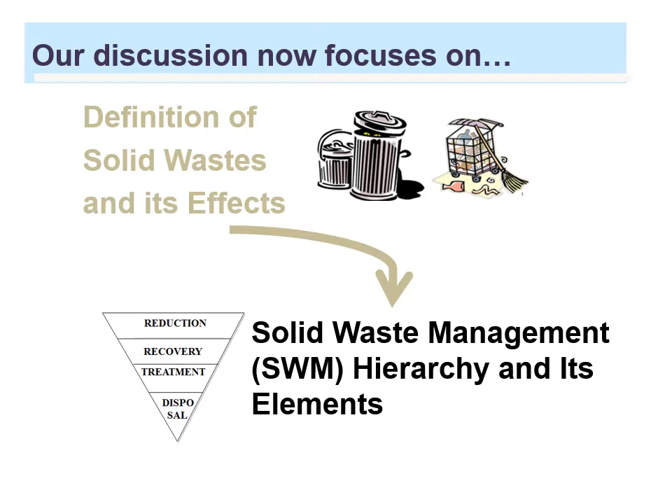This is the solid waste management hierarchy. It ranks the various management strategies from most to least environmentally preferred: prevention, reduction, recycling, treatment, and disposal. Prevention contributes the most to solving solid waste management, while disposal contributes the least towards the solid waste problem.

Prevention generally means there is no solid waste produced within the process. This is the most ideal, since if there is no solid waste, then there is no solid waste problem. Since this is very unlikely in a process, the next method in solving the solid waste problem is reduction.

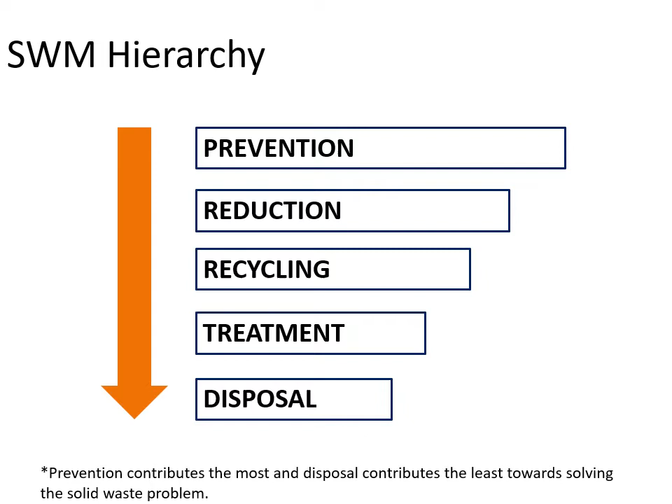Source reduction has common industry practices. First, we have materials reduction, which means reducing materials initially used. For example, plastic bottles before are generally different from the plastic bottles we have right now.

One example is the cap - the cap before is generally bigger than the cap in our plastic bottles right now. Also, the plastic bottles before were thicker compared to our plastic bottles these days - now they're thinner and generally more flimsy than before. That's an example of materials reduction.

We also have material substitution, which substitutes waste materials for more usable or biodegradable ones. For example, the use of eco bags or reusable eco bags instead of plastic bags - we substitute plastic bags for eco bags. Also, using reusable utensils instead of disposable ones.

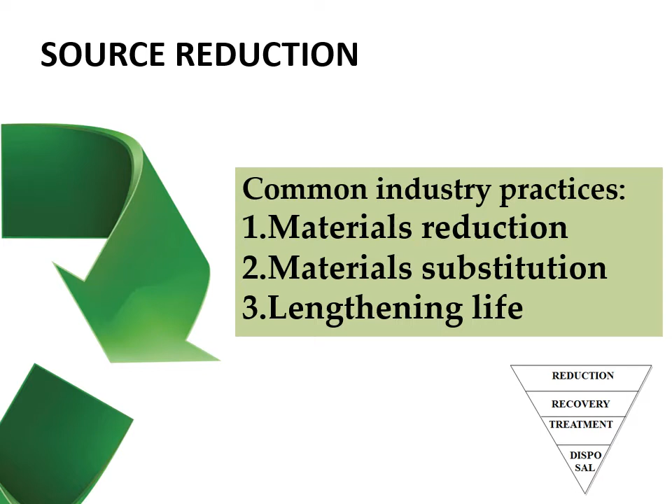We also have the lengthening of life, where the lifespan of a certain solid waste or potential solid waste can be increased to reduce solid waste as much as possible. This increases the reusability of a certain material so it will not go to waste as often. If one item has a longer lifespan, it reduces its chances of becoming solid waste - that's also one of the practices in the industry.

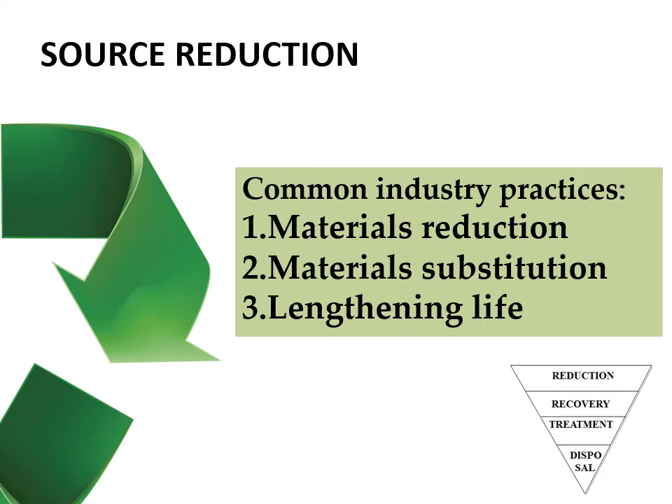Next we have recycling, or segregation and recycling. When our solid wastes are recycled and segregated, it is easier for us to identify its methods of disposal or recycling.

For example, in this photo, we have recyclable waste, or 'di nabubulok', which is non-biodegradable - these are commonly plastic bottles and such, which are non-biodegradable and recyclable. We also have 'nabubulok', or biodegradable.

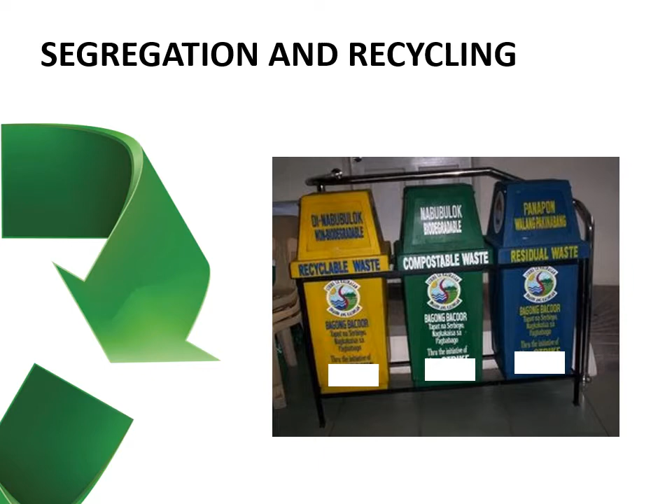These are compostable waste, generally food wastes or waste that decompose. We also have residual waste - these are wastes that cannot be recycled anymore and need to be disposed of.

Next we have treatment, or recovery and treatment. Resource recovery can be classified into two: material recovery and energy recovery. In materials recovery, this is generally also recycling.

For example, paper or newspapers can be used again to make more paper - this is called paper pulping. We also have composting, or biological reprocessing, where food scraps and other biodegradable materials can be turned into fertilizer, which is brought back into our plants and crops, and so the cycle goes on.

We also have energy recovery, which we have already tackled earlier on. This includes incineration, pyrolysis, biodigesters, RDF or refuse derived fuel, and landfill gas extraction.

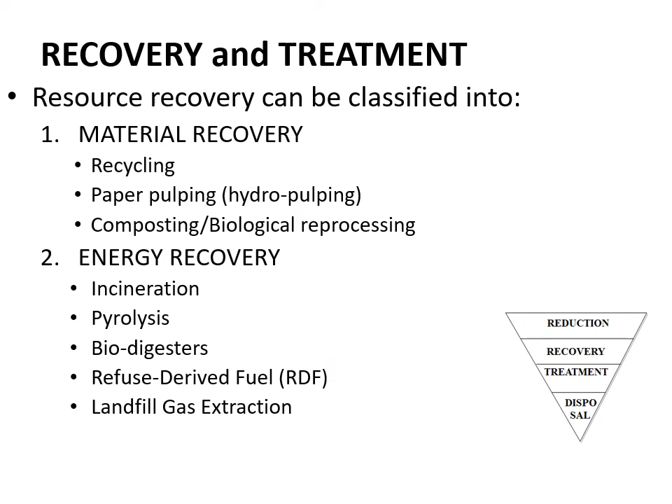All right, so let's take a look at composting and how it's done.

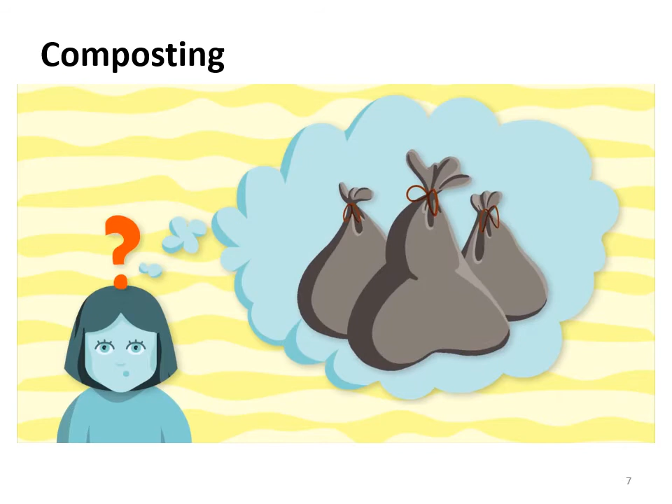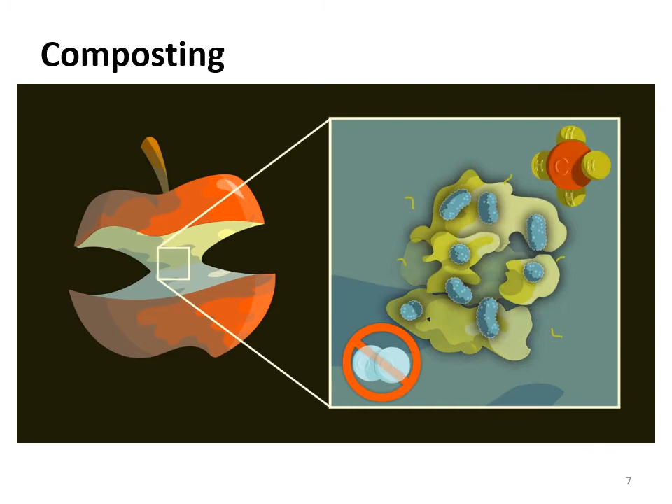Have you ever thought about where your leftover food goes after you throw it in the trash? Or the consequences that it has for our planet? In the US alone, about 37 million tons of discarded food were brought to landfills in 2015 - that's equal to the weight of 100 Empire State Buildings. In landfills, food scraps and other organic material are broken down by bacteria in the absence of oxygen, which produces methane, a potent greenhouse gas with even greater capacity to trap heat in our atmosphere than carbon dioxide.

Composting is an eco-friendly alternative to discarding our food waste with three important advantages. First, composting allows food scraps to degrade in the presence of oxygen, meaning no methane is produced. Second, composting mimics natural nutrient recycling processes, breaking down biodegradable materials to produce organic fertilizer, a sustainable alternative to synthetic fertilizers that require high amounts of fossil fuel energy to produce. Third, composting diverts waste from landfills, preserving natural ecosystems that would otherwise be cleared for landfill use.

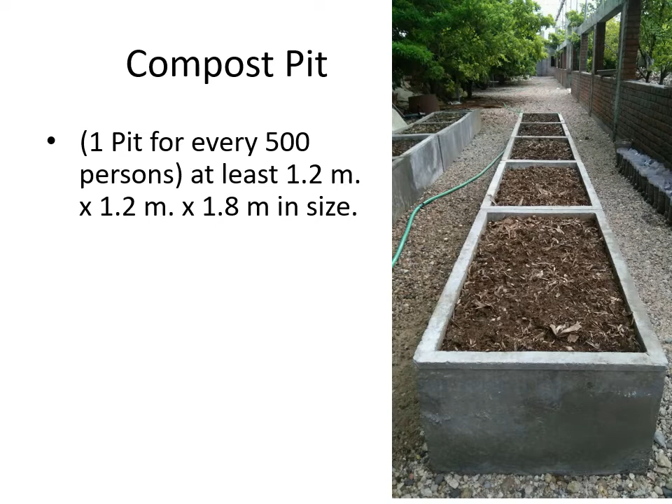But generally, a compost pit or composting is only for biodegradable materials. Non-biodegradable materials like plastic and sometimes paper or other materials that are non-biodegradable are not suitable for composting.

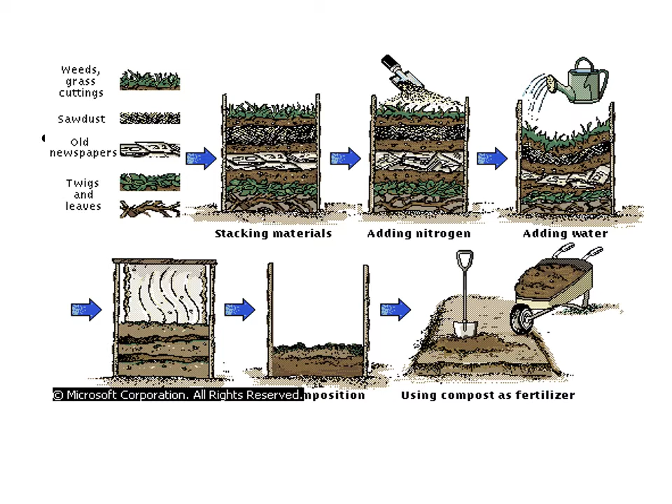So this is an example of a compost pit. We have stacking materials: twigs and leaves, old newspapers, sawdust, and weeds and grass cuttings at the top. If you add nitrogen or nutrition, like food scraps, and you add water, it promotes composting. It decomposes and becomes fertilizer. Then you can use the compost as fertilizer. All right, so there are no wastes generated.

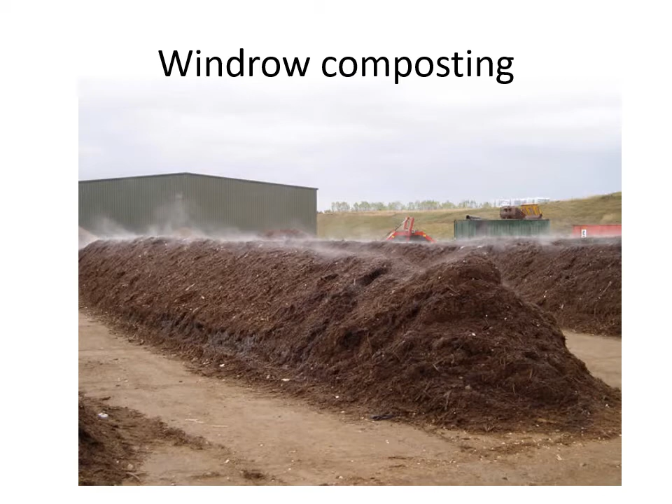In the industry, we have different types of composting, usually in the agricultural or farm industry. We have windrow composting.

How do we maintain 16 to 18% oxygen in these very large composting windrows? Doing this requires two things: first, an understanding of how air moves in a compost windrow, and secondly, an appreciation for the need for enough porosity in the compost material.

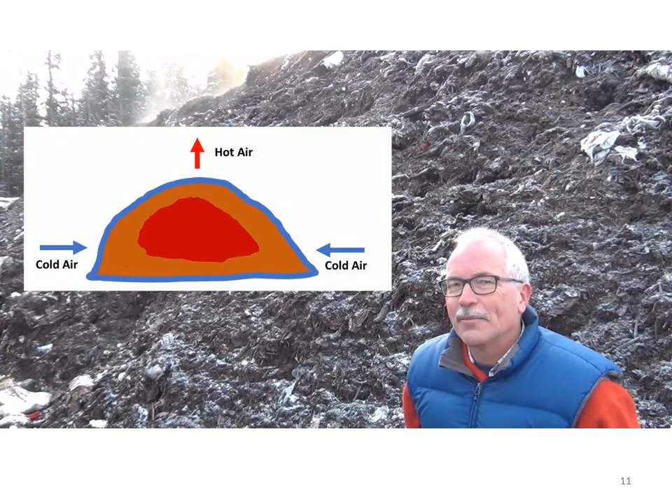The way aeration works in a regular compost pile is that as the core of the pile heats up, that hot air wants to rise, and as it rises it creates a vacuum, drawing cold air in from the side. As we increase the size of the windrow, this gets much more difficult because there's not enough oxygen in the core to create those high temperatures.

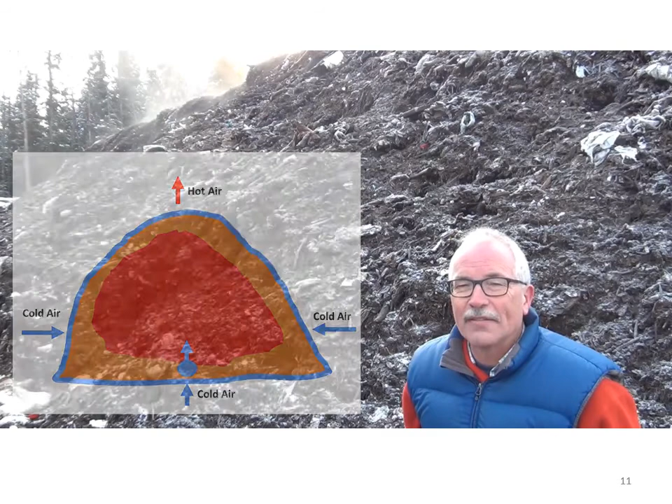The solution is to provide aeration. By placing a 4 to 6 inch diameter pipe underneath the bottom of the windrow, we achieve two things. First, we add oxygen to the core of the pile, which allows that pile to heat up and create the vacuum required to draw cool air in from the side. Secondly, the force of the air coming up through the pipe creates a bit of an aspiration effect where it also draws in cold air from the side.

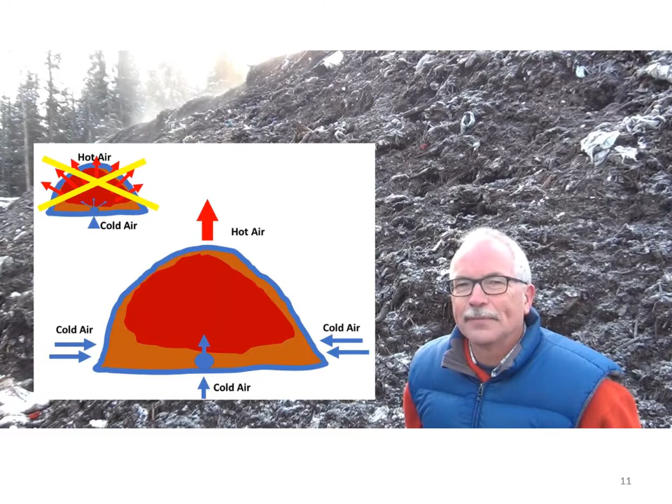The result is that we can provide 16 to 18% oxygen in very large windrows using a very small centrifugal blower. In this particular case, we have windrows that are 30 feet wide, 15 feet high, and up to 120 feet long, and they're aerated with a half horsepower centrifugal blower. The energy and air requirement for a similar quantity of composting material in an aerated bunker or extended aerated pile would be dramatically greater.

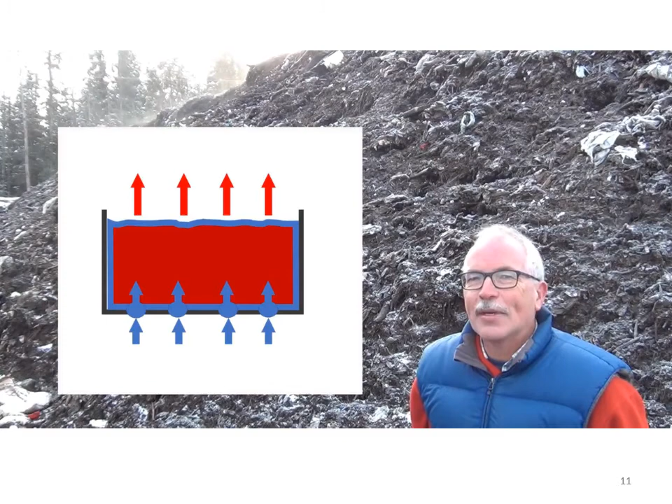So we can see, by understanding the dynamics of how air works in a composting windrow, we can produce a high quality compost, maintain very high oxygen concentrations, and reduce odor for a minimal cost.

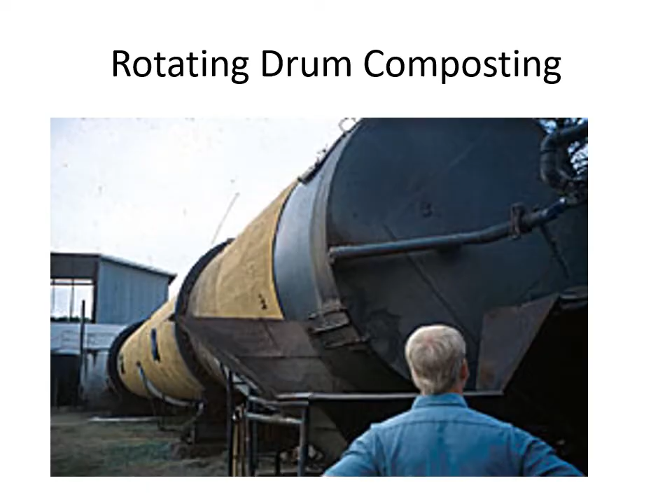So generally, in composting, nature has its way in decomposing materials. But for example, in a biodigester, it uses anaerobic digestion, or decomposition without the presence of oxygen.

And so these materials produce methane. This methane, or biogas, for example, as you can see here, there is waste produced, for example, from the market, and then this is fed into a digester.

In the digester, the sewage sludge decomposes and produces methane gas. This methane gas is fed into a storage area, or methane storage, or it is turned into electricity. And so the solids, on the other hand, become compost and eventually become fertilizer.

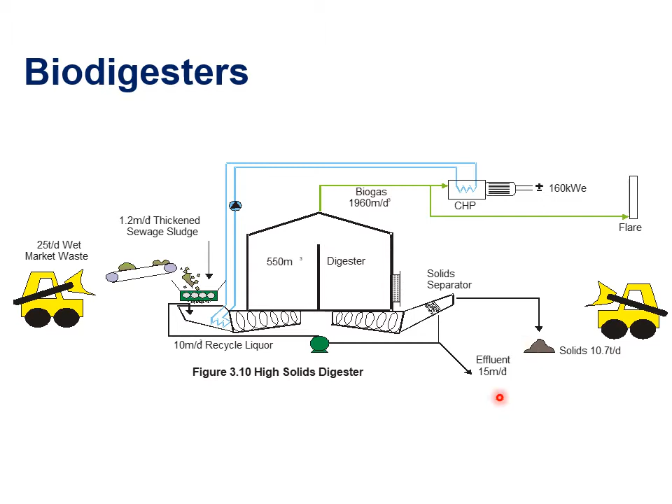All right, so this is a biodigester. This is how a biodigester works.

In the spring of 2013, the Saskatchewan Research Council built a biodigester for the Canada Agriculture and Food Museum in Ottawa. SRC created a small-scale model of a biodigester, a system that converts farm waste into energy.

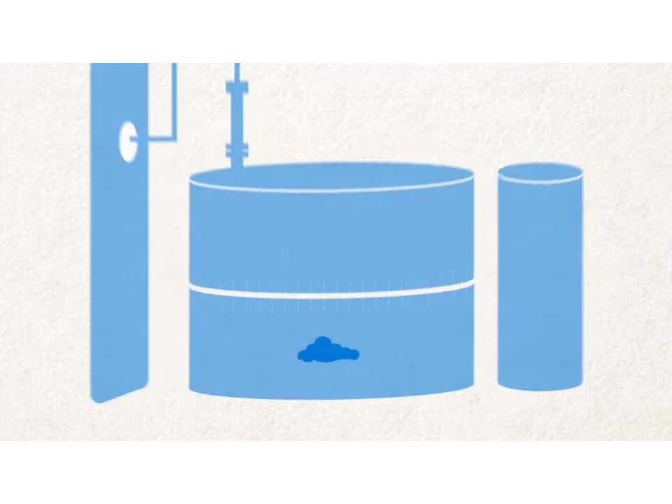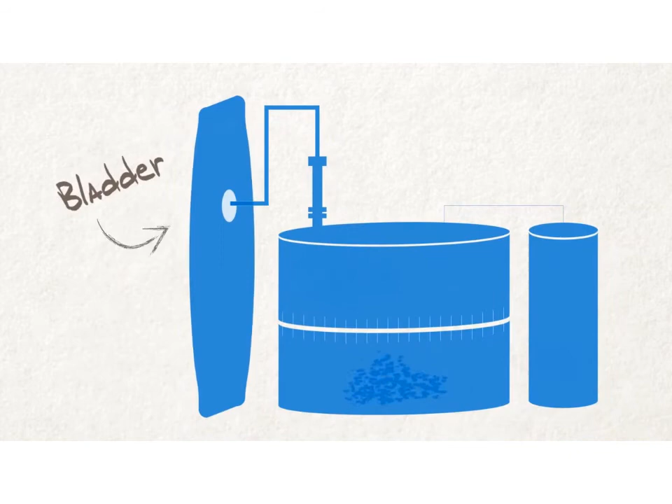Manure from the farm is put into the tank, where microorganisms ingest it and produce methane gas. The methane is collected at the top of the tank and moves into the bladder, which looks like a big bag. When the bladder is full, it releases the gas, which can be used as a source of energy.

Back inside the tank, the leftover product is called digestate, which can be removed from the tank and used as fertilizer. The biodigester is a truly sustainable concept. It turns a waste product into energy and fertilizer, and is a tool that can help farms across Canada become more environmentally friendly.

Alright, so that was a biodigester.

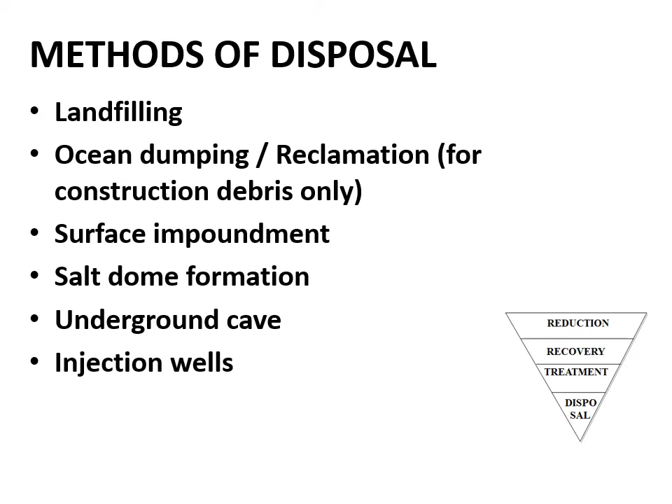So let's focus on the most common, which is landfilling. But before that, there is such a thing as open dumps.

If you know the Smoky Mountain in Tondo, Manila, it is supposed to be a landfill, but you will know later on why it is not. Alright, so it was actually just an open dump. Generally, open dumps are open.

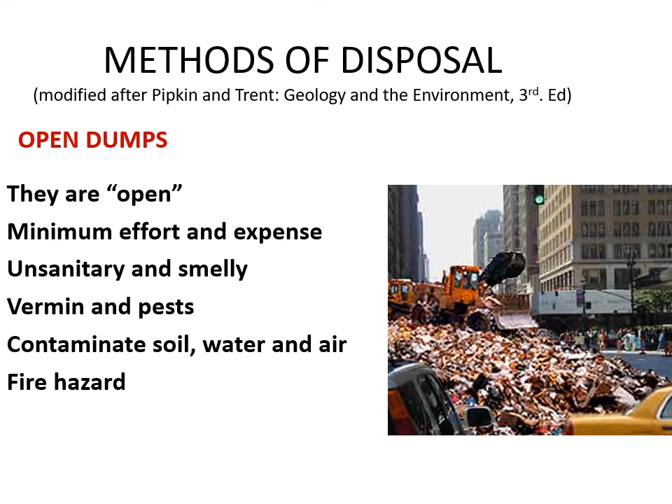So open dumps have minimum effort and expense, but they are unsanitary and smelly, and promote vermin and pests in the surrounding areas. They contaminate soil, water, and air, and are a fire hazard. You'll know later on why it's a fire hazard. So this is an open dump area.

Now, in a sanitary landfill, these days open dumps should be replaced with sanitary landfills. Each day, trash is spread in thin layers, then compacted down and covered with a layer of soil, and graded for drainage. For example, step one: unload the solid waste and spread it into thin layers. Then these layers are compacted and covered with soil.

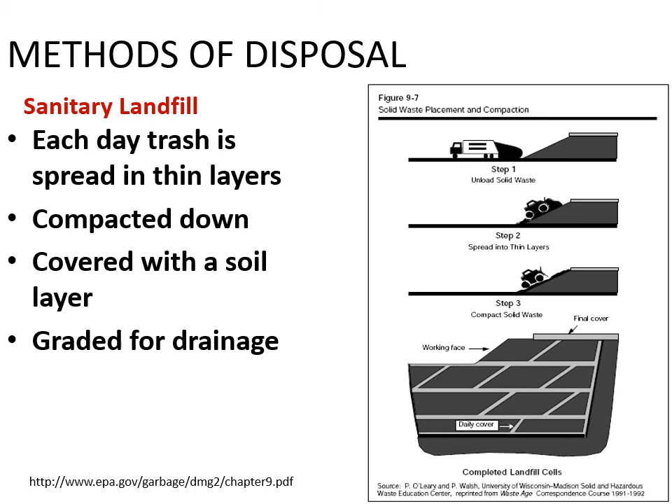So these sanitary landfills have largely replaced open dumps. This is the explanation, or an example, of sanitary landfilling. A sanitary landfill is an excellent method of solid waste management.

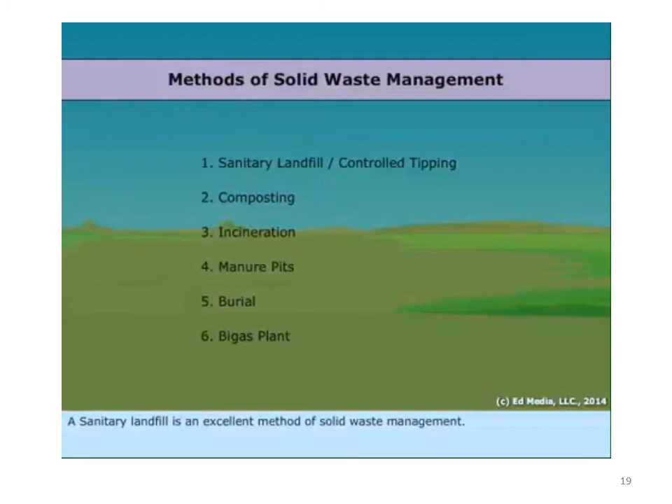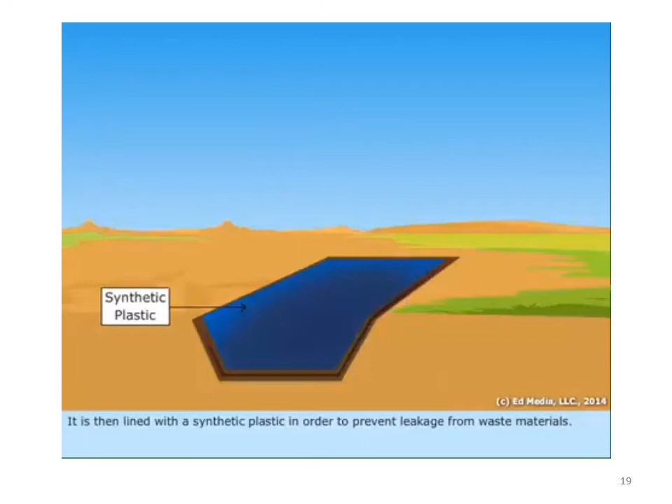Initially, a large pit or depression is made by the removal of topsoil. It is then lined with synthetic plastic in order to prevent leakage from waste materials. This is called a bottom liner. Garbage wastes are dumped into the landfill and properly compressed using specialized machines.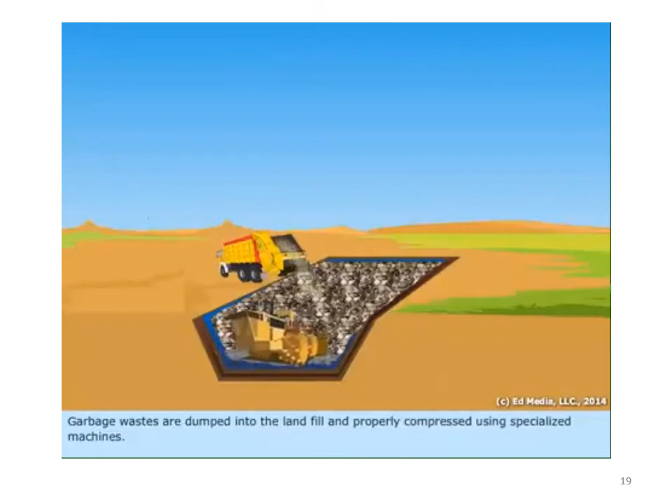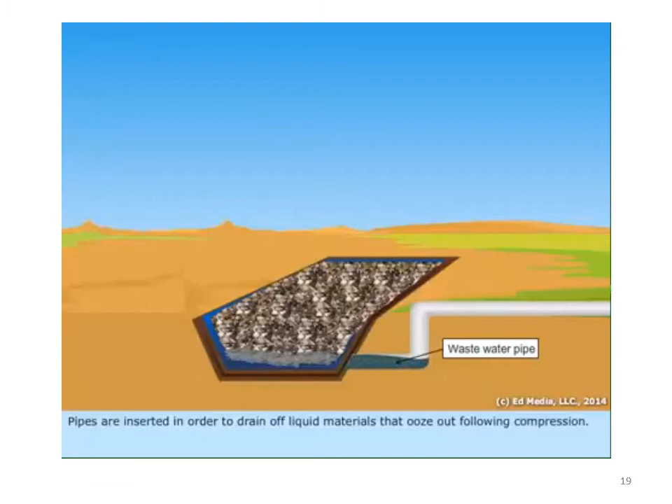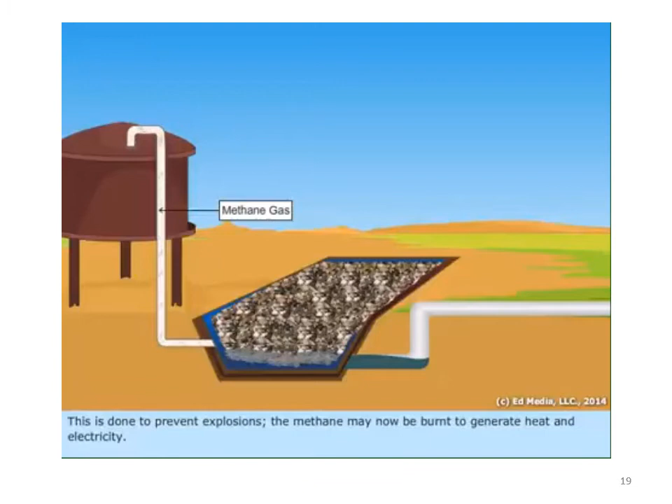Pipes are inserted in order to drain off liquid materials that ooze out following compression. Methane gas produced by the decomposition of wastes is collected into separate pipes. This is done to prevent explosions. The methane may now be burnt to generate heat and electricity.

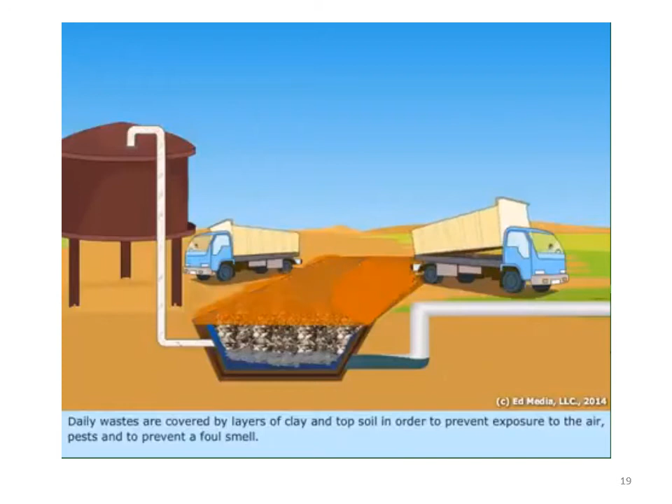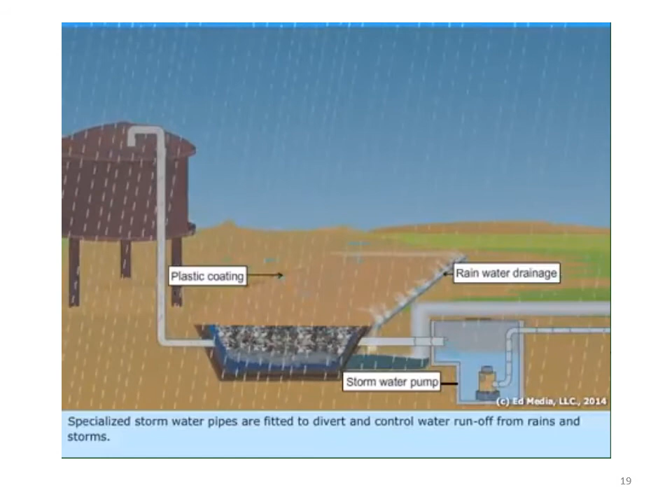Daily wastes are covered by layers of clay and topsoil in order to prevent exposure to the air and pests, and to prevent a foul smell. Specialized storm water pipes are fitted to divert and control water runoff from rains and storms. This is an ideal method for the disposal of solid wastes.

Alright, so that was sanitary land filling. A sanitary...

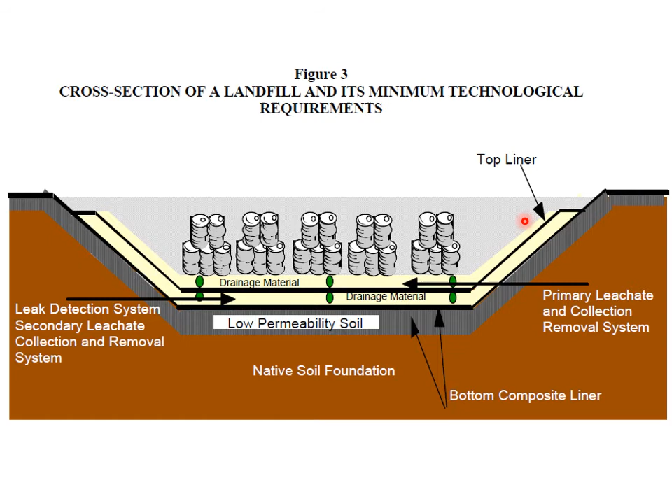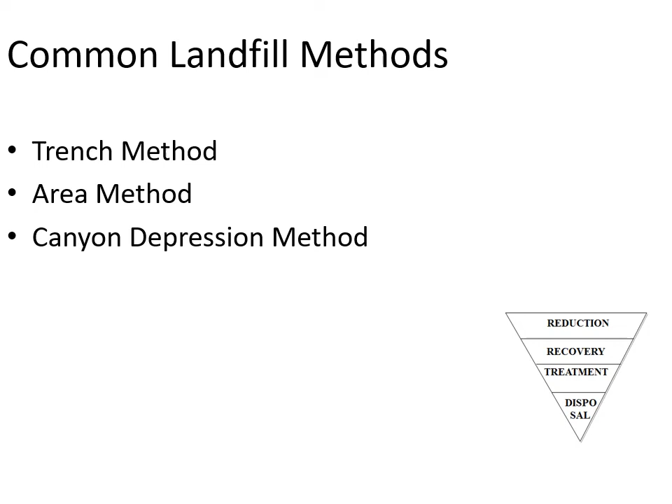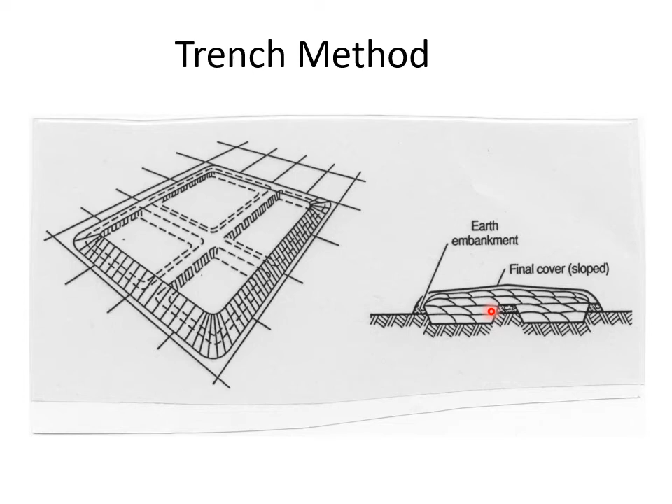So it creates a depression and digs deep underneath. This is flat, and this is where the liner is. This is the trench method. So this is a cross section of the trench method landfilling.

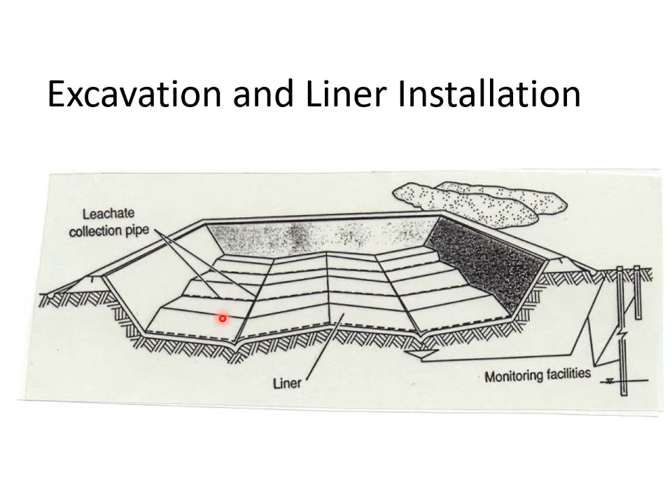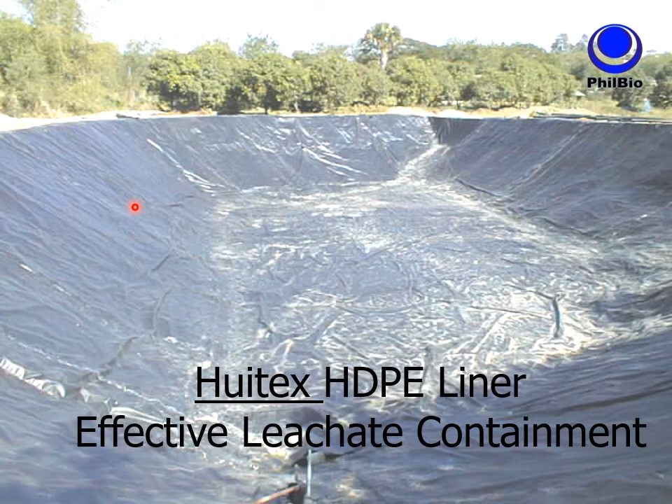We have the liner here. And we have monitoring facilities underneath, and leachate collection pipes here in between. This is an example of a liner, usually HDPE is used. This is very effective in leachate containment.

So this is generally what happens in a landfill. On the top that covers the landfill, we have the topsoil, sand, and clay, then the compacted solid waste. There are different probes to detect methane leaks, and leachate monitoring and groundwater monitoring wells.

All right, so here you see there is a methane gas recovery pipe. This pipe goes to the methane storage and compressor building and eventually the electricity generator.

There are also leachate pipes here. As you can see, there are two leachate collection systems: the primary and the secondary. One at the top of the liner, which is this blue one, and one at the bottom of the liner. All right, so this is generally the sanitary landfill.

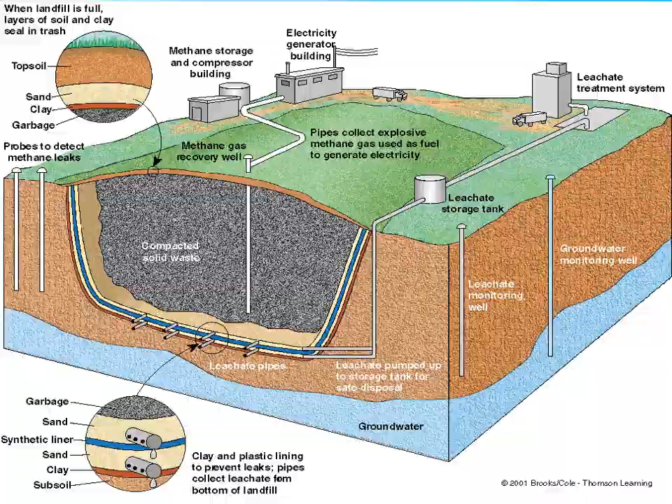We also have the area method. It's actually the same, it has all the requirements and facilities that trench method landfilling has. But instead of having a depression where the soil is dug deep, the area method has embankments at the sides which hold the compact solid waste, and it is actually like a mountain landfill. Instead of digging deep, it goes on top of the native soil, but there are earth embankments at the side for the solid waste to keep its shape and not spread.

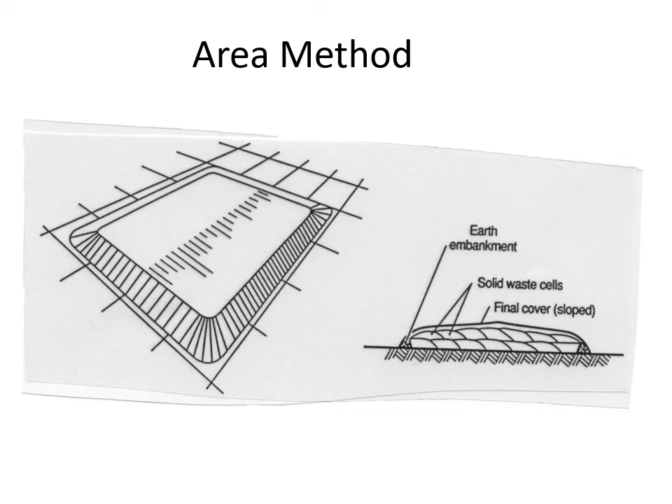We also have the canyon depression method. This method is on a slope, like stairs going down. This is an example of the canyon depression method sanitary landfill. So we have the liner here, and this is the original ground.

So generally it is like making stairs, right? This is the working cell, the most recent trash or solid waste that is brought to the landfill and is then covered with soil, topsoil, and clay.

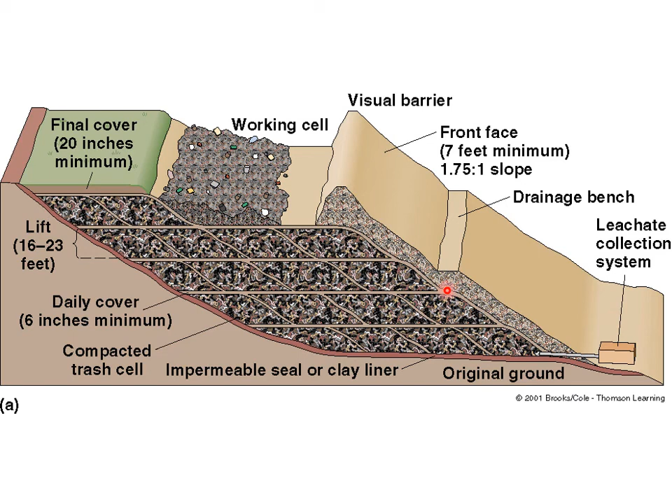The leachate system is at the bottom. What's good with this canyon depression method is that the leachate goes to one place, so it only needs a few pipes since everything flows downward. All the leachate goes down, so the leachate collection system is only at the bottom. Unlike in the trench and area method, where the leachate collection pipes are spread along the whole area of the landfill. So this is a main difference.

Properly designed sanitary landfills prevent water infiltration and leaching of toxic fluids. So what is leachate? It is a liquid that has passed through or emerged from solid waste and contains soluble, suspended, or miscible materials removed from such waste.

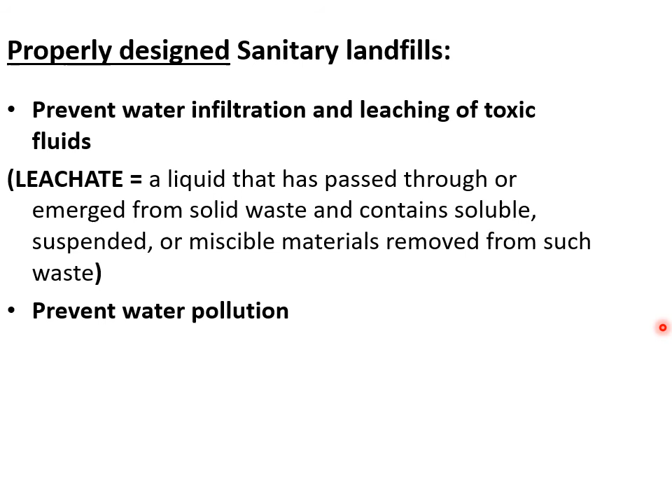It's more like a liquid coming from our garbage, since there are usually liquids mixed in. Since our garbage is compressed in a sanitary landfill, the liquid coming out from it is called leachate. This can be harmful to our groundwater system. Properly designed sanitary landfills prevent water pollution, reduce vermin and pests, and reduce smell, toxic gases, and fire hazards.

First, prevent water pollution. Since the sanitary landfill has a leachate collection system, primary and secondary, it also has probes or wells that monitor groundwater systems, so it could prevent water pollution.

It also can prevent vermin and pests because the area is covered, unlike an open dump which is not covered, so many animals can spread there.

It also reduces smell, toxic gases, and fire hazards. Since it is covered, smell cannot penetrate the atmosphere, as well as toxic gases and fire hazards. Since a sanitary landfill also has a methane collection system, and methane is the fire hazard, without the collection system a fire could start anytime in a landfill.

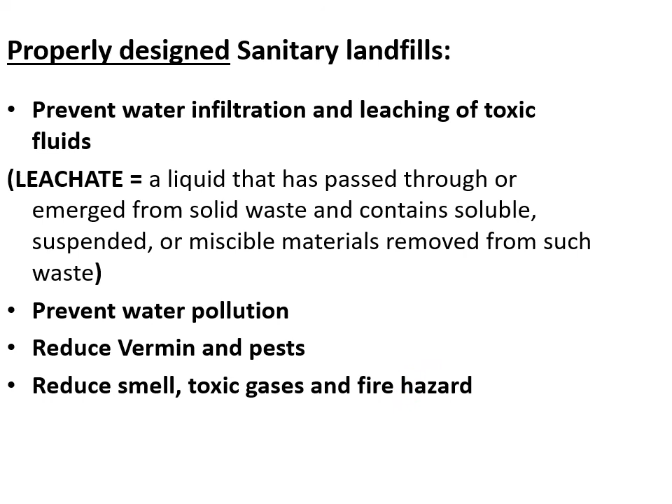But the problems with landfills: it requires a lot of space, and it produces methane gas that can be used for energy or can cause climate change. As mentioned from the video earlier, methane is very harmful to our atmosphere, so without a proper collection system of methane in sanitary landfills, it is quite dangerous.

Leachate must be collected and treated. This is very costly, to create a system that would collect the leachate, and it could be a potential for water pollution if the leachate collection system is not proper.

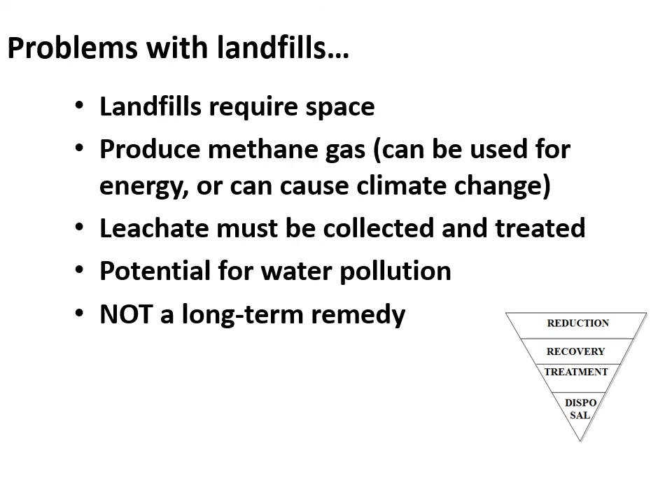And with this, since landfills are not forever because it's hard to maintain with everyday trash and solid waste, landfills could eventually be filled up and become insufficient, so we will need more landfills to create. So it is not a long-term remedy.